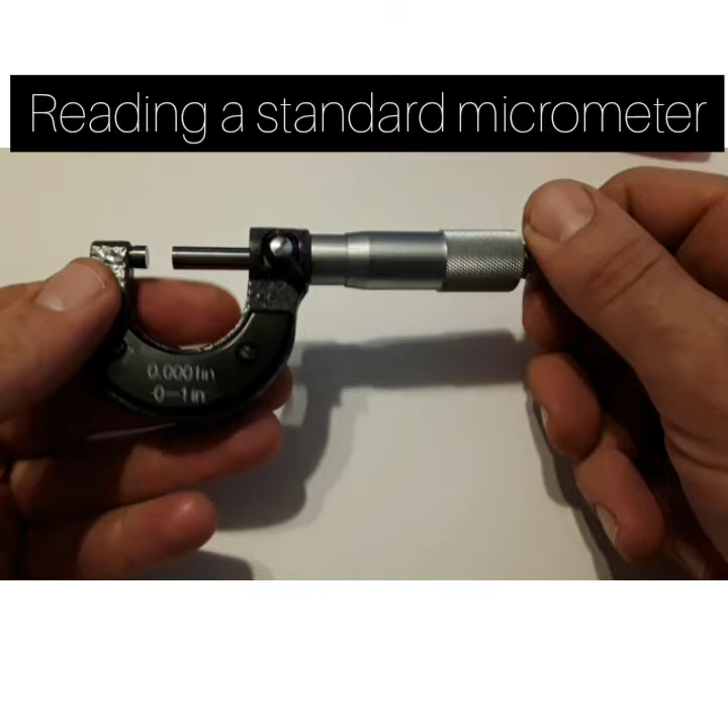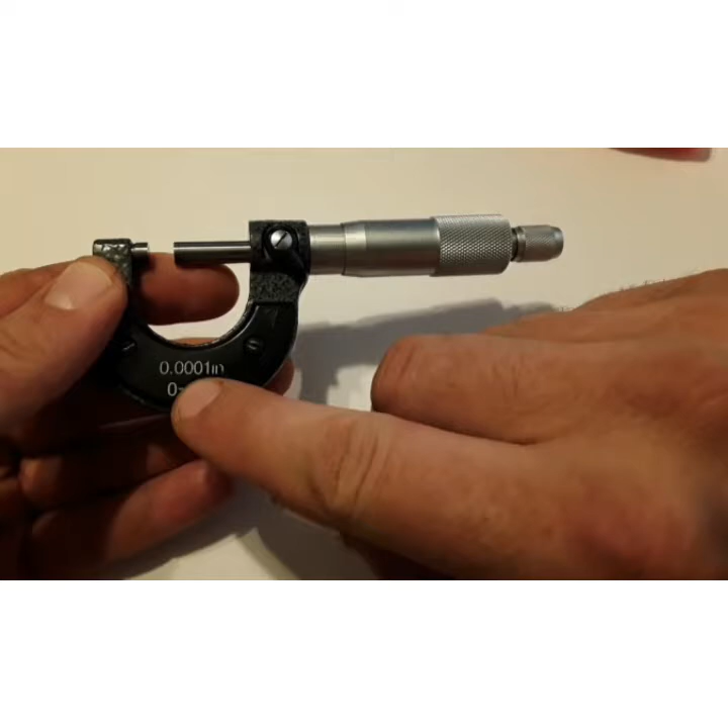In this video, I'm going to show you how to read a 0 to 1 inch standard micrometer. This micrometer will read as accurate as 1/10,000th of an inch. That's the 4 decimal place 1 there that you see.

Just going to start by zeroing my micrometer. This is the thimble ratchet that you're always going to use to tighten it, so you don't over tighten it. I'll tighten it all the way in. What you're looking for is that this 0 on the movable thimble lines up with the 0 on the number sleeve. I've pre-zeroed this micrometer, so it comes with a little tool, and if you need to turn your sleeve so those numbers line up, you can do so.

I'm going to start by just opening this thimble up and exposing some numbers and lines so we can see a pattern arise here. You can see that it starts at 0. Then we have whole numbers 1, 2, 3, 4, 5, all the way to 0 again.

The 0 that I showed you was 0.0000. And if I open this micrometer all the way up, so my 0 lines up with that 0, my 0 on my thimble wheel lines up with the 0 on the number sleeve here. That is exactly 1 inch, 1.0000.

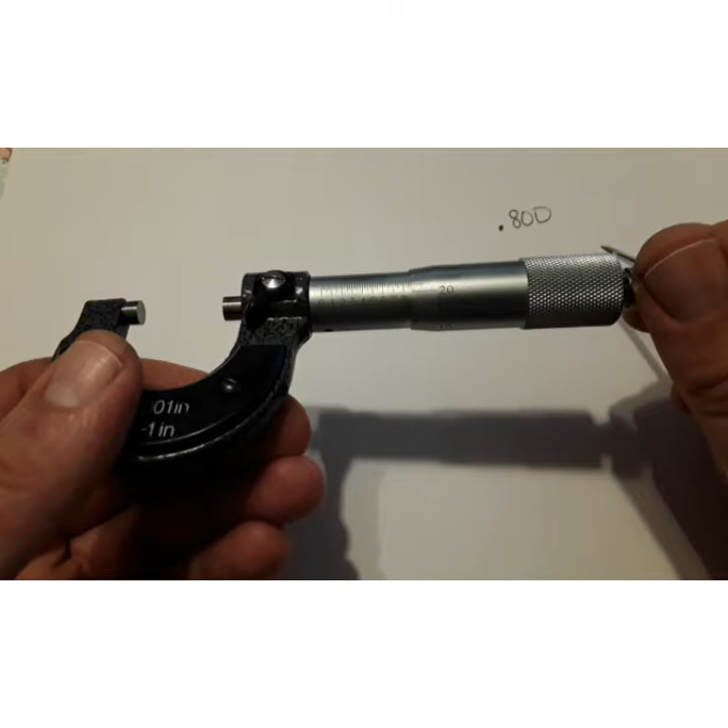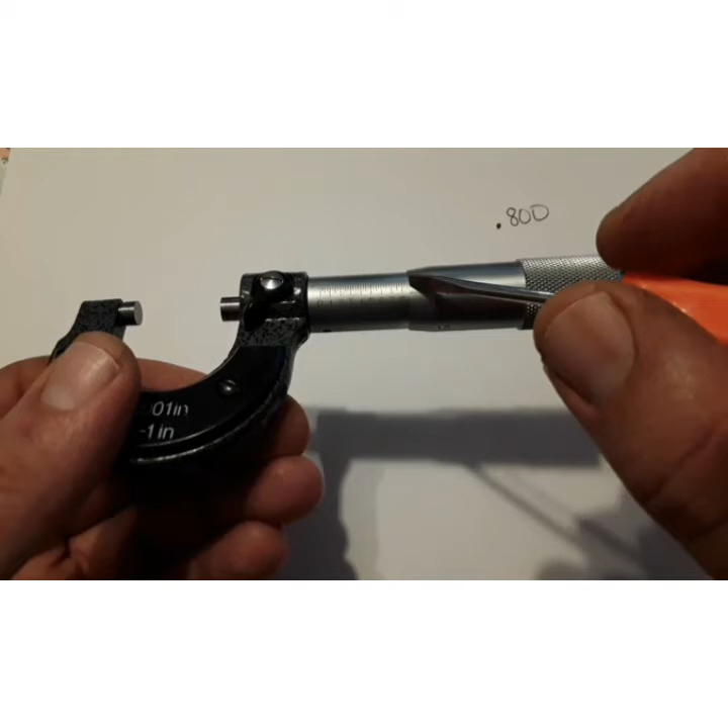Then the next step, after reading the number line, is to read these little graduation lines after the number 8. Now we have to see how many lines are exposed after the number 8. You're going to see 1, 2 fully exposed lines there, and almost another one. But it's kind of like reading a clock - until that line's fully exposed, you don't count it. So with 2 lines exposed, you can see between, let's say, the numbers 7 and 8, there are 3 lines. Each line represents a quarter. So this would be 7 1/4, 7 1/2, 7 3/4, and 8.

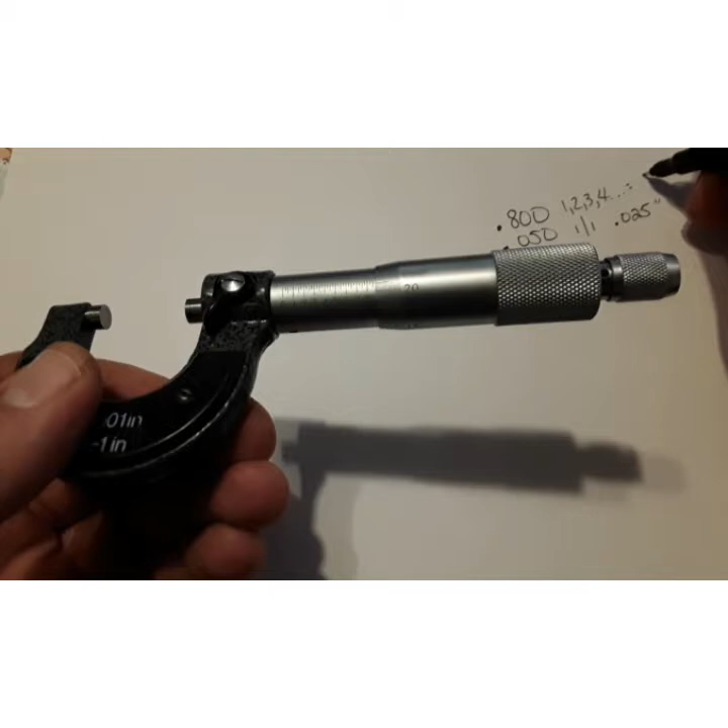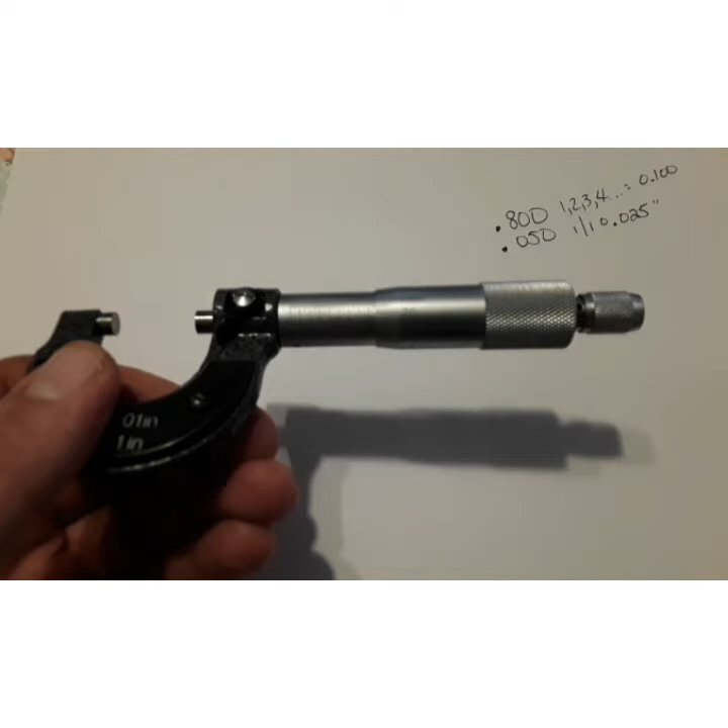We have 2 lines exposed after the 8. The way we're going to add those is 0, 5, 0. Each line like this represents 0.025 of an inch. Where up here, the numbers are equal to 0.1 each one of them. Do you see that?

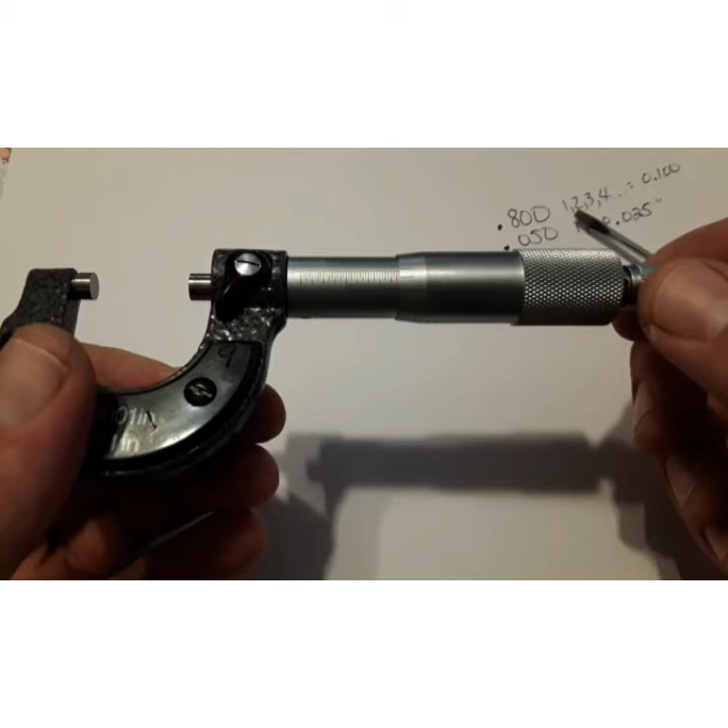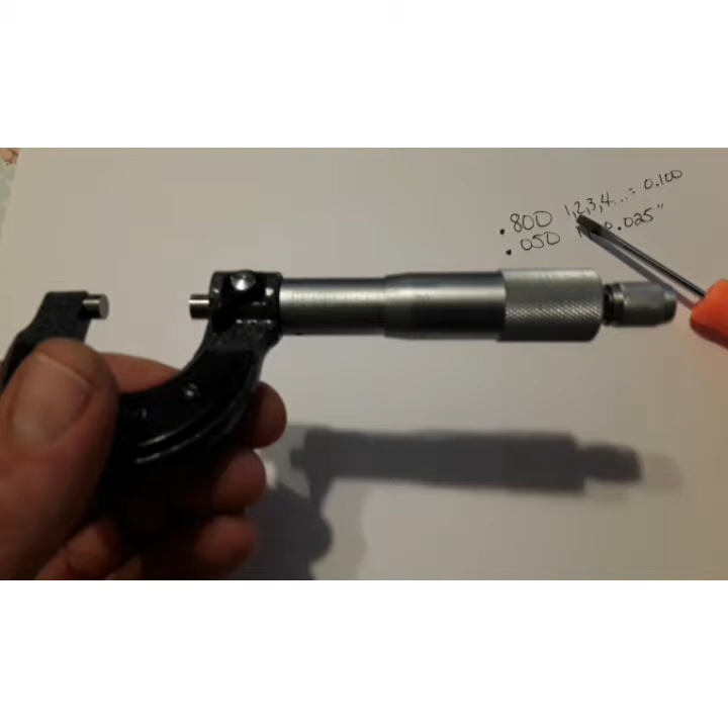Now, the last number that we need to read, or second to last, is which line on the movable thimble lines up with this 0 line on the sleeve. I'm going to hold it still so it's clear. You can see the number 20, 21, but it's not quite at 22. So again, you always count the number that has gone past the 0.

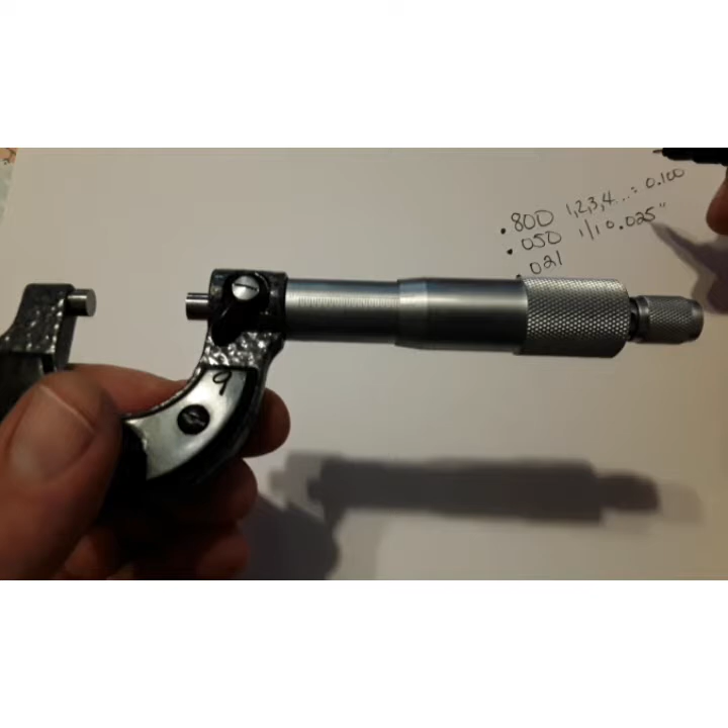So how do I write that down? I write that down in thousandths of an inch again: 0, 2, 1. 21 lines up with the 0. 21 and something - pretty close to 22, but 21 and something.

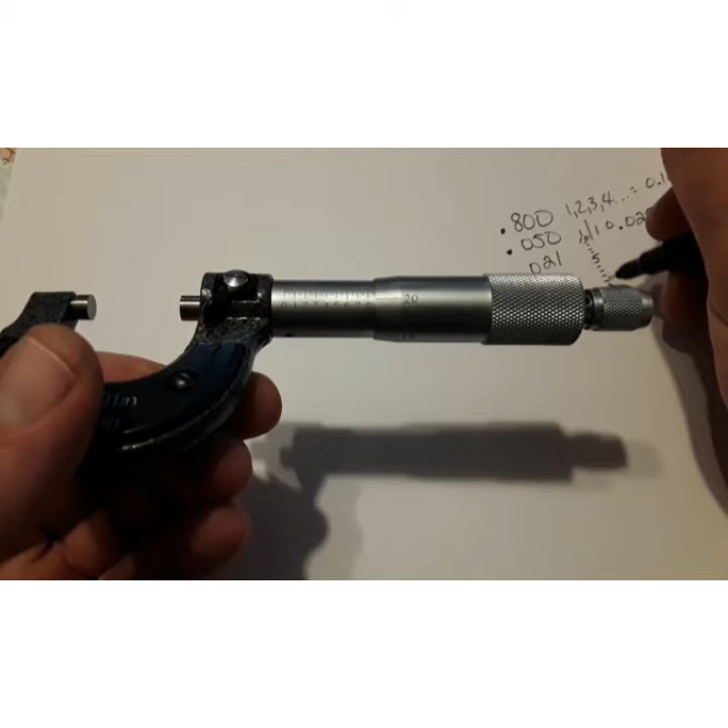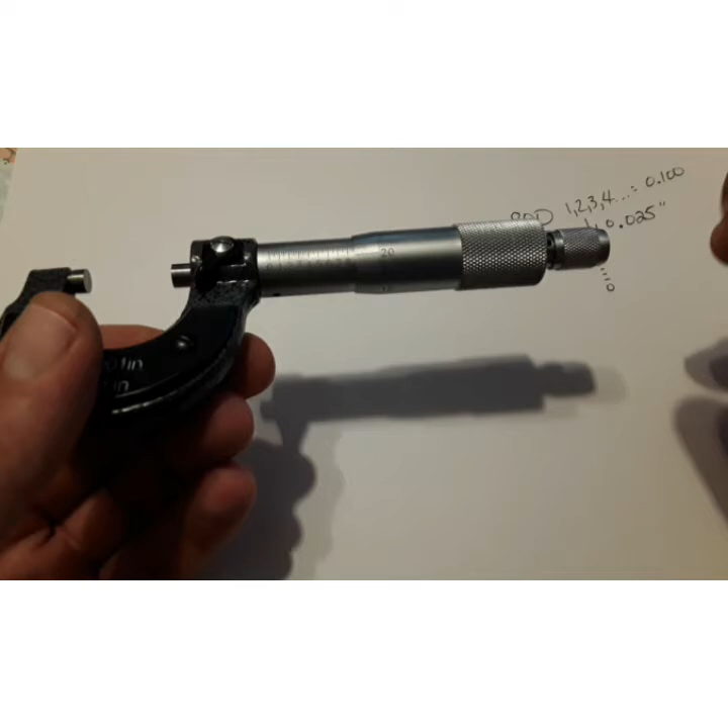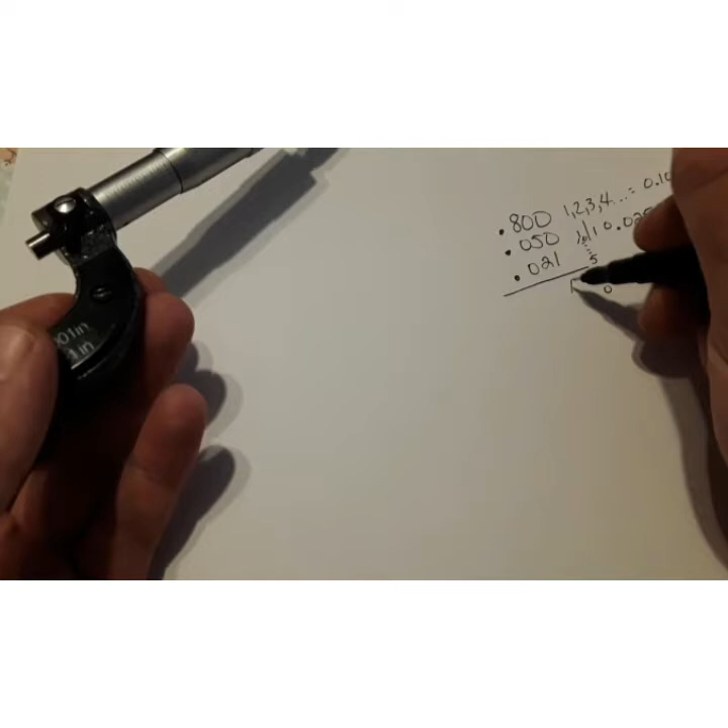So you can see here that the numbers on this thimble, if I were to go dot, dot, dot, dot, 0, it would go dot, dot, dot, dot, 5, and all around to 25. That's 0, 5, 10, 15, 20, 25. The number reading is 21.

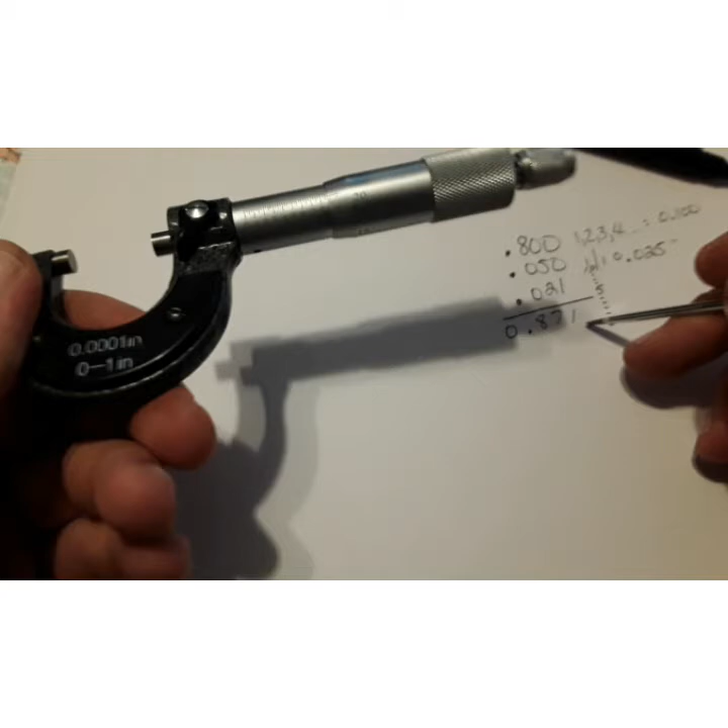So what I'm going to do is add these 3-digit numbers together, and I'm going to get 8, 7, 1. It's 0 point, because this micrometer reads from 0 to 1 inch. So all my numbers are going to be 0 point something.

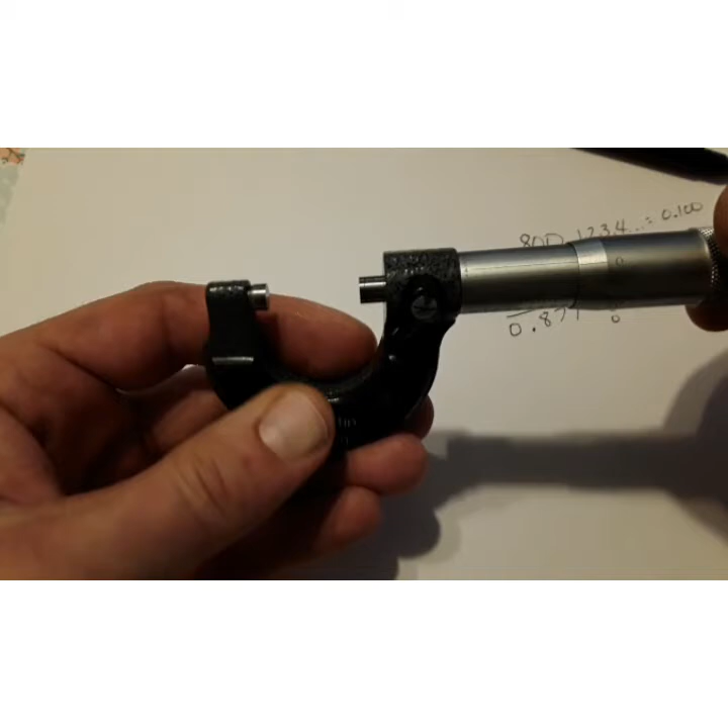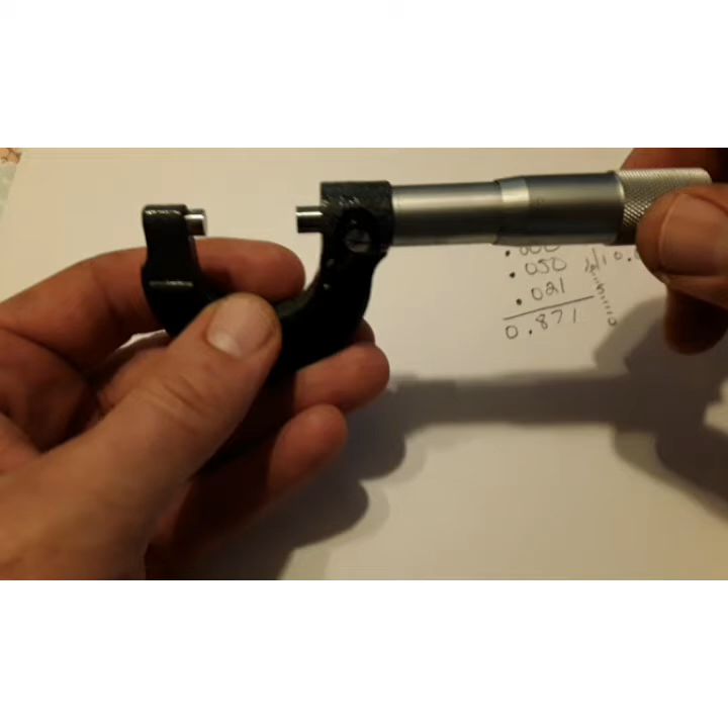Now the final step, and it's kind of a cool one, is getting the 4th decimal point. You can see that we are on 21 but close to 22, so I imagine my 4th decimal point is going to be a rather high number. We have these numbers along this left side: 0, 1, 2, 3, 4, 5, 6, 7, 8, 9, and 0 again. What you're going to do is determine which number makes a straight line with one of the lines on the thimble. That number will represent your 4th decimal point.

So I will stop my pen from rolling and check this out. I'm going to do it without staring at the camera because I want this to be very accurate. I'm expecting a high number.

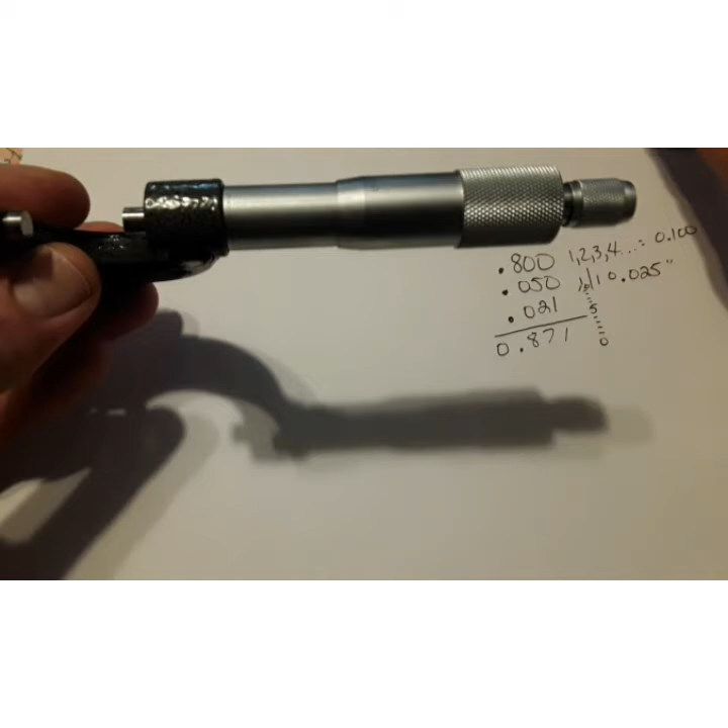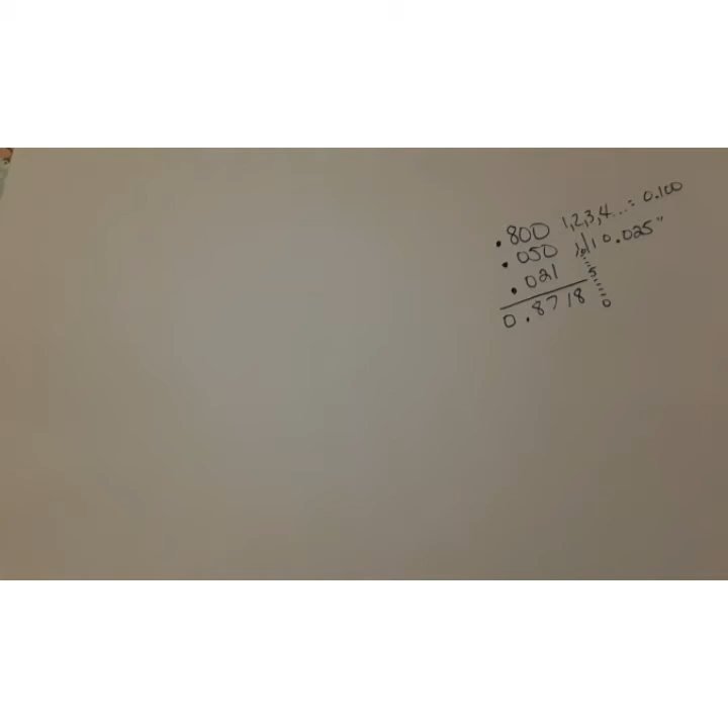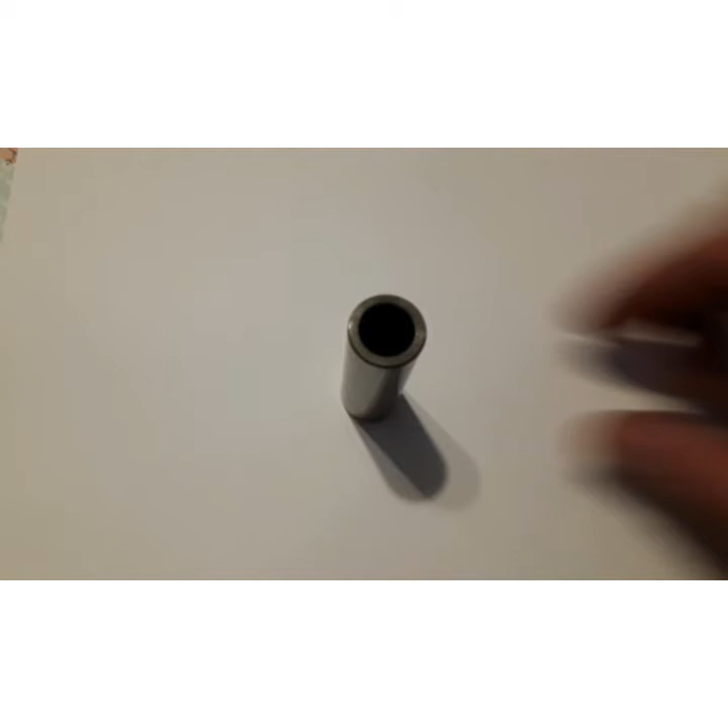So 9 is very, very close to a straight line. 8 is, and so is 7. But the straight line is formed with the number 8. You should clearly see that there. So what we do at the 8 is we add it to the end. And there we have accurately measured something to 1/10,000th of an inch.

Okay, so the next thing I'm going to do is actually measure a part. I've got this wrist pin out of an engine, piston pin if you will, and I know my micrometer zeroed, so I'm going to put the piston pin in the jaws of the micrometer, and I'm going to try to do my best to keep this very centered. This piston pin is accurately machined to numbers like 1/10,000th of an inch, so this is a perfect part to measure. I'm going to show you that it's in the center of the micrometer as close as I can visually with my eyes. I'm going to lock it in.

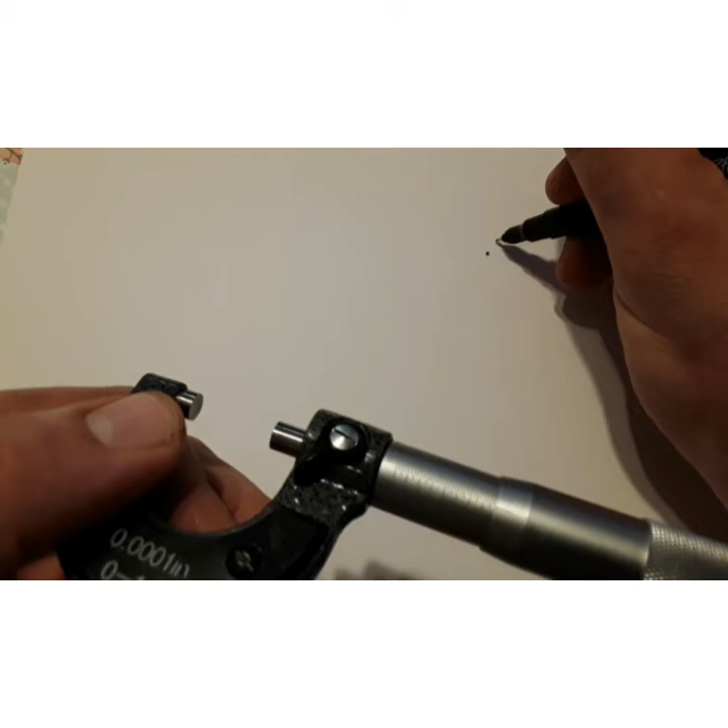I'm going to take out my piston pin and then I'm going to read my numbers, just like we previously finished. So let's do this right now. The number that I see exposed is a 7. So I'm going to add 0.700.

Now I'm going to count the number of lines that I see exposed after the 7. Each one is a quarter. So I have 1, 2, 3 lines clearly after the 7. That means that I add 0.075.

Then I'm going to look at which number lines up with the 0 on the sleeve. 11. Oh boy. I would say 12, just about exactly. This will be a really good lesson for everybody. Pretty much 12 exactly. What I'm going to do is I'm going to look at that fourth decimal point.

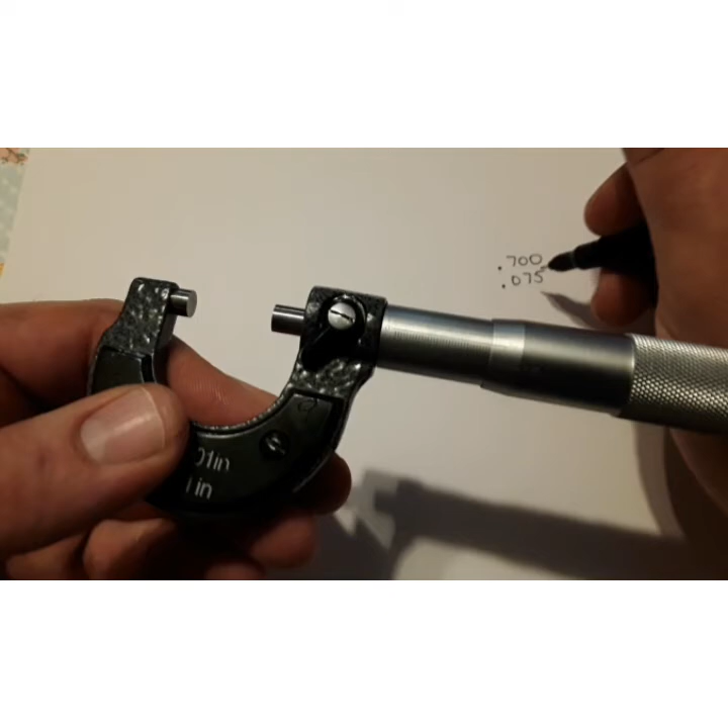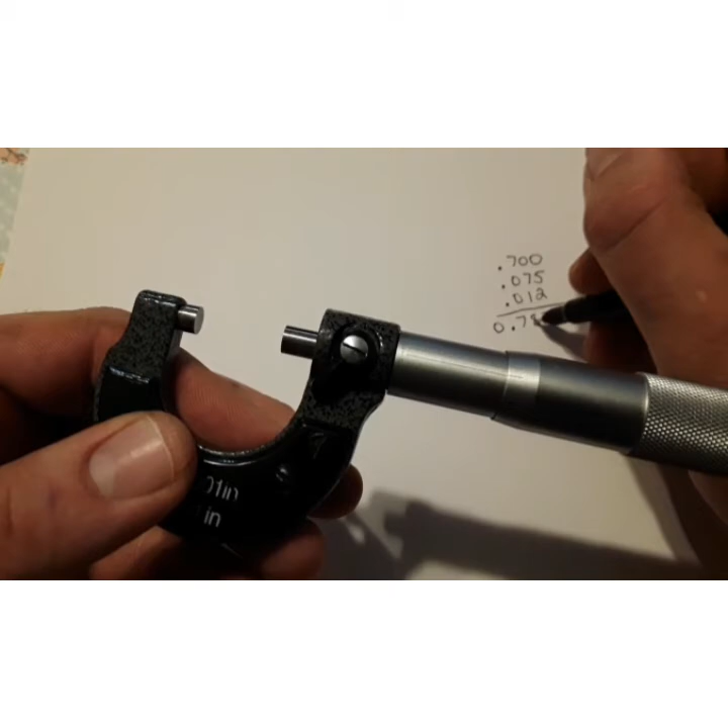And that fourth decimal point will be a 0. Knowing that it's going to be a 0, that means that that 12 counts. Kind of a tricky one for everybody as practice, but it is good. So I write down 12, I add these together: 7, 8, 7. I have 0.787, and then we'll check out that fourth decimal point, and the 0 is the one that makes the perfectly straight line. So we'll add that to the end.

That's how you read a 0 to 1 inch micrometer. Here I have another micrometer to show you, and it's a 1 to 2 inch micrometer. It reads to an accuracy of 1/10,000th of an inch, which is 4 decimal places again.

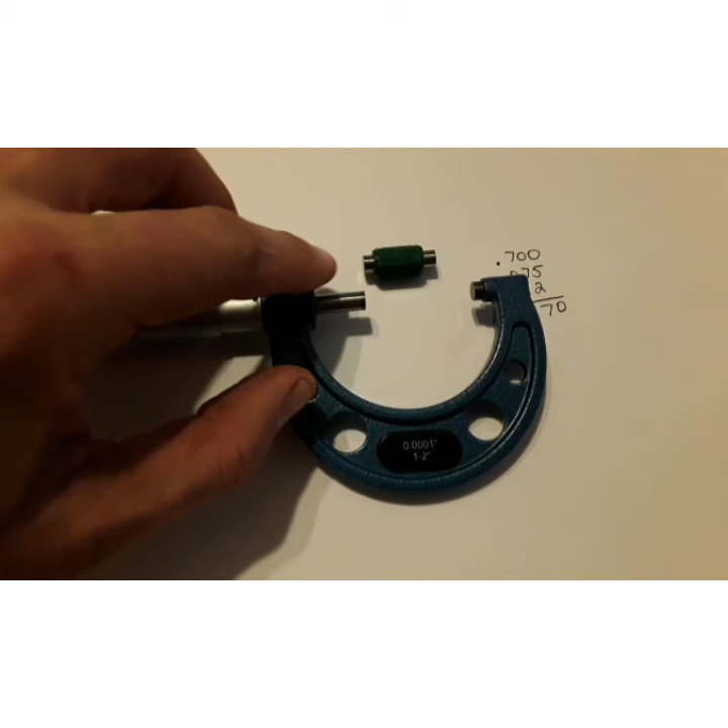And it's no different to read. You're going to read those last 4 decimal places, but the number is going to start with 1. The only difference to reading a bigger micrometer is you must have one of these dies with it to zero it. This die is exactly 1.0000 of an inch. It's very precision, so make sure you take care of it.

And when you've got to zero this micrometer, you'll put the die in place and you'll tighten it down. I'll try to do this with one hand. What am I talking about? I'm definitely using 2 hands. Okay, so we'll line this up really good so it's precise.

You can hear the ratchet click, and you can see that my 0 is lined up with my 0 line. Again, if it's not, you're going to use the wrench that comes with your micrometer to turn the sleeve. There's a hole in there so it can hook in and turn. Anyways, that is the way that you're going to read a standard mic. It won't help you reading a metric micrometer. They are different, or a digital one. But that should give you a good understanding of how to use a standard one.